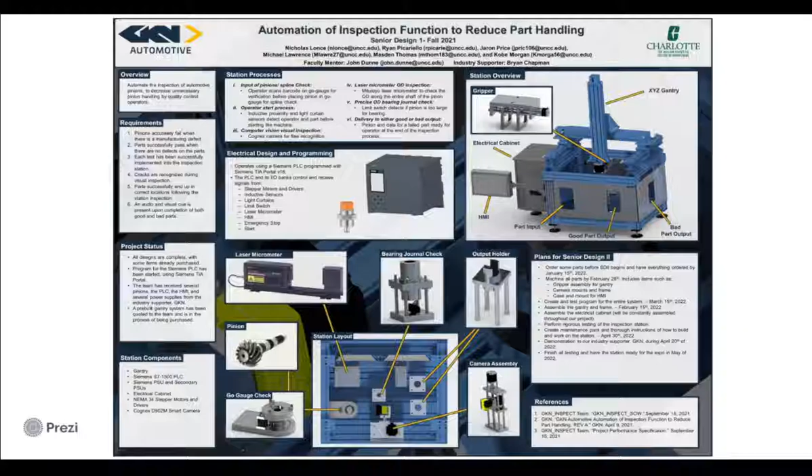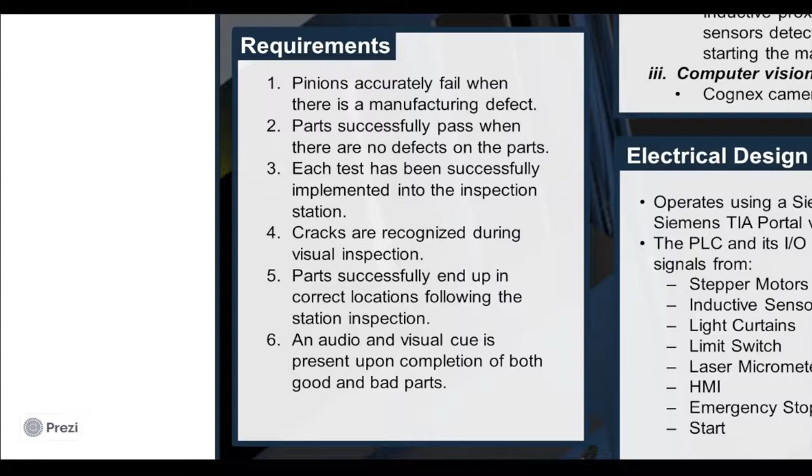The goal of our project is to automate the inspection of automotive pinions to decrease unnecessary pinion handling by quality control operators. Some of our requirements include pinions accurately failing when there's a manufacturing defect, cracks being recognized during the visual inspection process, and an audio and visual cue being present upon completion of both good and bad parts.

Our station processes include first, the input of pinions, which are input into a go gauge to check the splines. This is followed by the operator start process, which includes a light curtain for safety. Third is a visual check completed with a smart camera. Next is a laser micrometer check on the bearing ODs. Fifth is a bearing OD check to further inspect two outer diameters of the pinion. And finally, the process ends with the delivery of the pinions to the good and bad outputs for the operator to grab the parts.

Our station components include the gantry, a Siemens S7 1500 PLC, two Siemens power supplies, along with two other power supplies to power the motors, an electrical cabinet, NEMA 34 steppers and drivers, and a Cognex D902M smart camera running a machine learning algorithm.

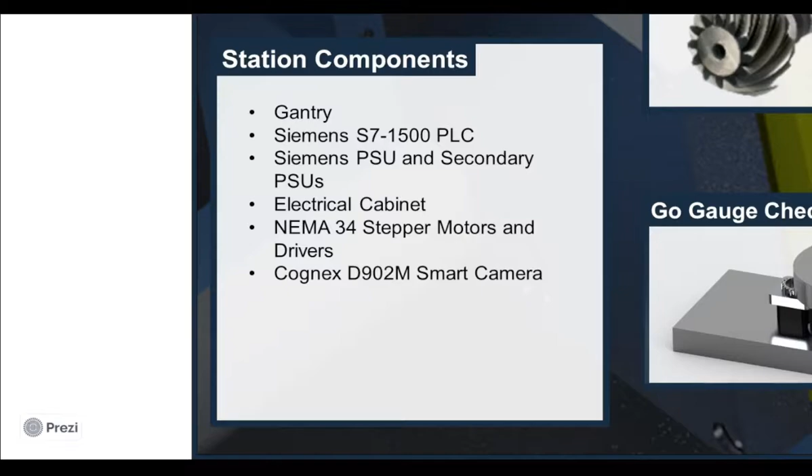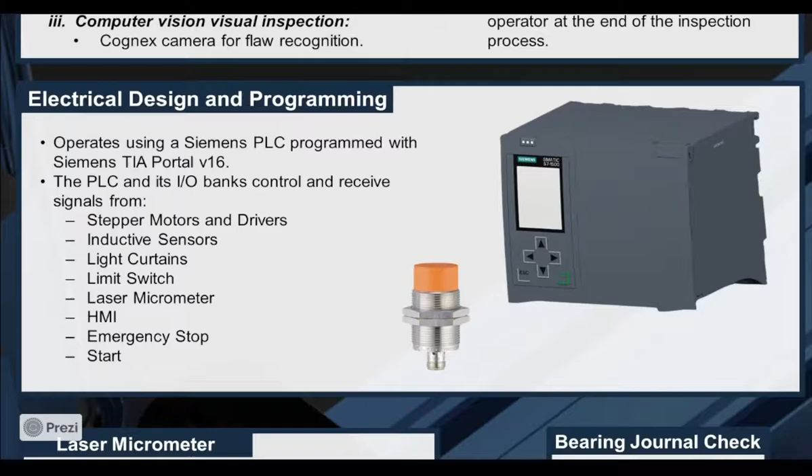As said before, the machine uses a Siemens PLC, and this will be programmed with Siemens TIA Portal version 16. The PLC will control its I/O banks and receive and control signals from the stepper motors and drivers, the inductive sensors, laser micrometer, the HMI, and the emergency stop.

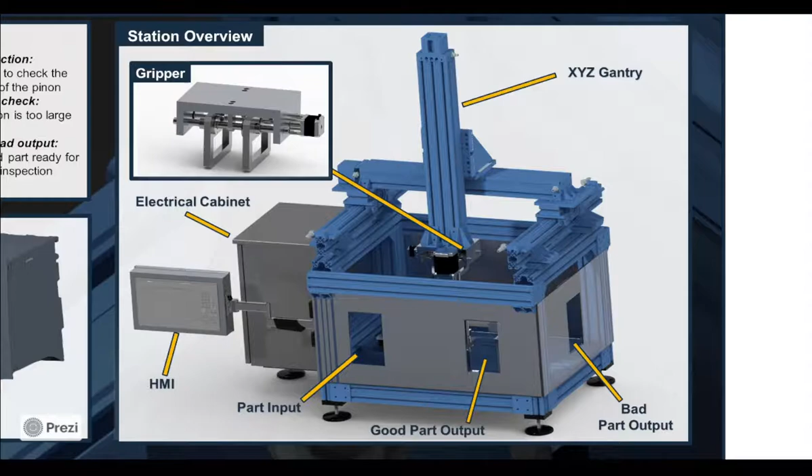Here's the station overview. At the bottom, you can see the part input along with the good and bad part outputs. The bad output is separate to reduce complacency. In addition, there's the HMI on the left, the electrical cabinet, which will house the PLC and some other components, and the XYZ gantry with the gripper in the top left that will be mounted to the bottom of the gantry.

Here are some of the different checks. You can see the pinion where it goes into the go gauge, followed by the laser micrometer and the bearing journal check, along with the good and bad output holders, and finally the camera assembly.

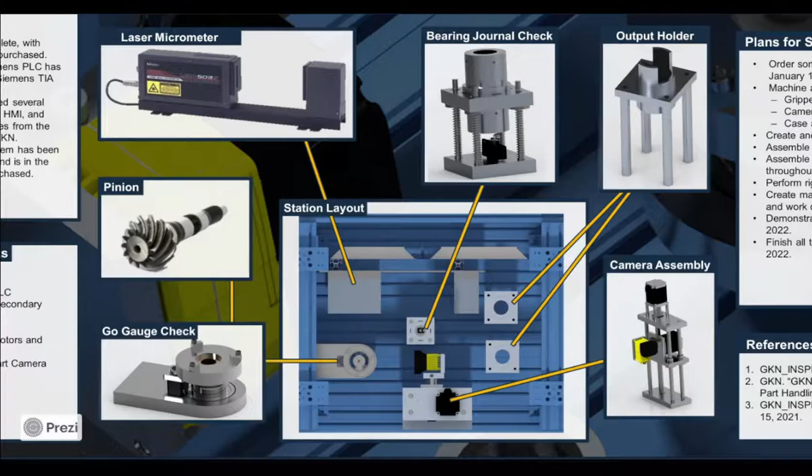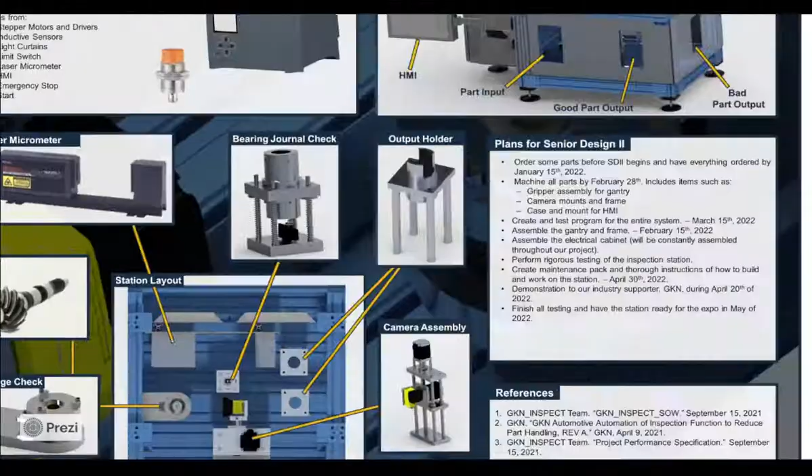Currently, all designs are complete with some items already purchased. We've also received some items such as the PLC, HMI, and several power supplies. Next semester, the plans are to have all parts machined by the end of February, with testing beginning in April, followed by the final Expo, and all testing being complete by May of 2022.

Here are references, and these files have been created by the team.